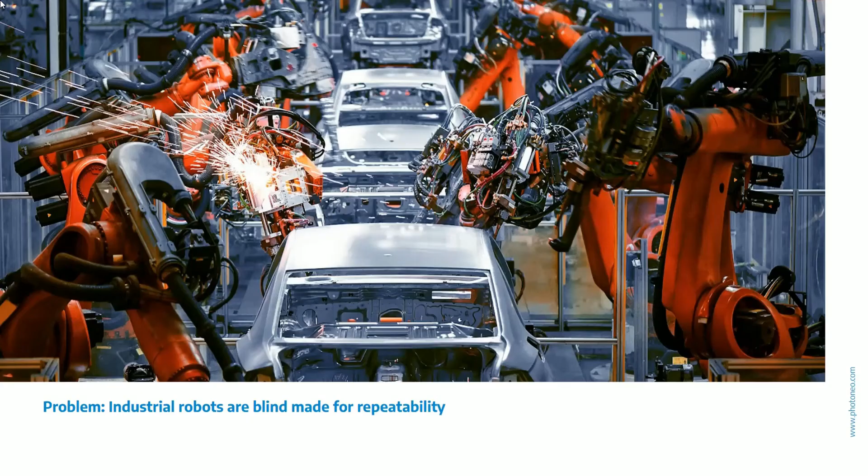Why have we started with bin picking as the first problem in vision-guided robotics? I'm sure you've seen this kind of production line or participated in its build, and it's surely an amazing piece of technology. On one side, you have metal plates entering the manufacturing process, with a number of welding robots, and on the other side of the production line, every minute or so, there is an entire car chassis built. Now, while this looks amazing, there is one problem associated with it, which was also a cost.

If you want to put anything into this production line, it costs you money. Either operators are stacking the metal sheets at the entry level of the production line for the robots, so they can go to exactly the same position for every cycle, or you need to build or buy a one-purpose machine, or a construction for stacking these metal sheets, pillars, screws, or anything required for a car chassis to be built.

At Photoneo, we were thinking about whether there is anything we can do about it, and a solution to that problem already exists, having been a subject of research in vision-guided robotics for a couple of decades. The definition of vision-guided robotics is simple: a robot should be equipped with a sensor or camera, and if you do so, your robot should be able, with the involvement of certain vision algorithms, to move towards a target.

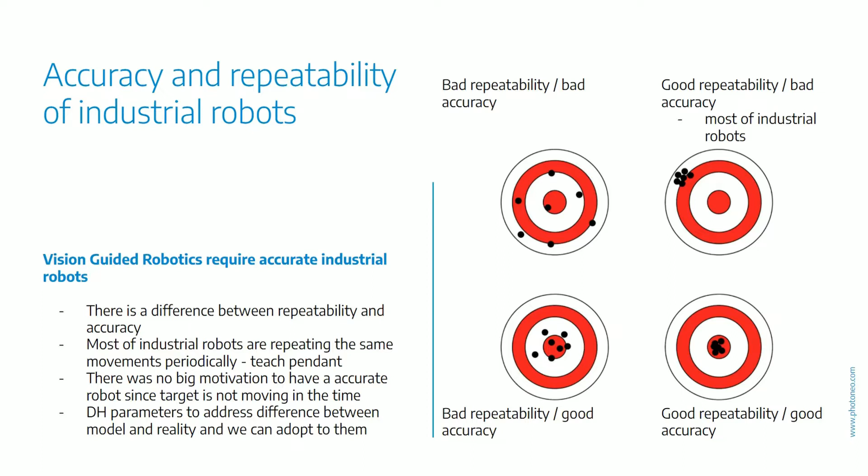Our motivation is transforming the experience and knowledge from projects delivered by Photoneo into a product which enables our partners to deploy robust and reliable bin picking applications. With Bin Picking Studio, we are able to adapt to many scenarios regarding 3D vision-guided robotic picking, whether parts are placed in the bin in a structured way, a semi-structured way, or completely randomly oriented.

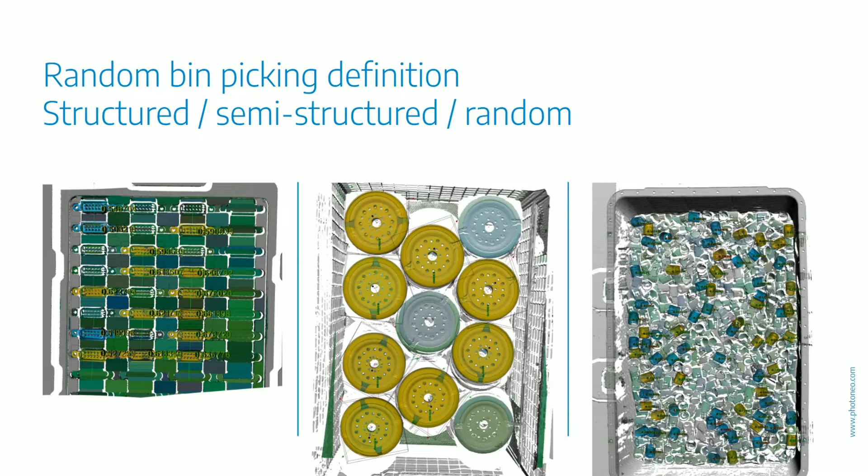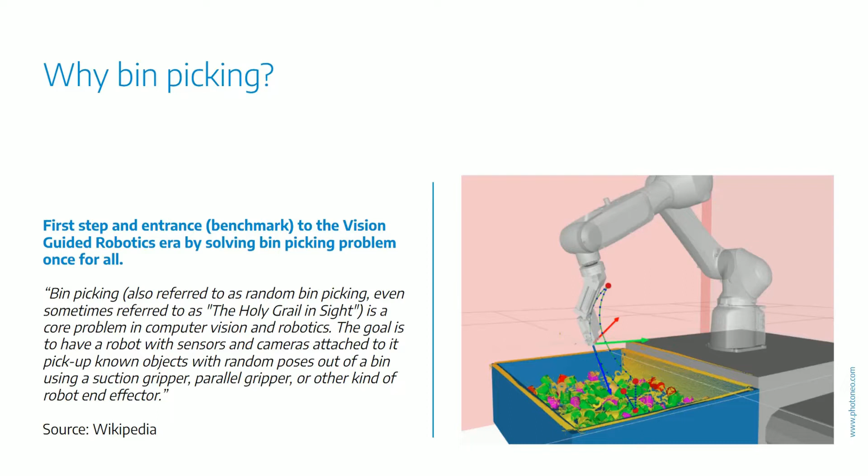Why bin picking? At Photoneo, we started working on bin picking applications because this is a core problem in computer vision and robotics. The goal is to have a robot with sensors and cameras attached to it, able to pick up known objects with random poses out of a bin using a suction gripper, parallel gripper, or another kind of robot end effector.

So why is it difficult to do bin picking? If you think about it, it wasn't so many years ago when the majority of bin picking applications were actually built on greenfield. What you need to do as a company is acquire certain skills in order to build a bin picking application. You definitely need a person who understands mathematics, geometry, and robot kinematics.

You need a person who is able to work with technical drawings, a person capable of programming a robot, and you need the operating system for running your software. You need solid software engineers to implement vision algorithms. You need a 3D vision sensor or camera, and you need to be able to create localization algorithms.

This is a wide variety of advanced skills, and it's really difficult to find a person who masters all of these skills. Even if you find somebody, it would be a very expensive thing. If you want to build a team where each member masters one of these skills, it's not going to be cheaper either.

So, we at Photoneo were thinking if there is anything we can do about it, and we found out there are actually just two skills available in the area of our customers: technical drawing and robot programming. So we created a tool designed for robotic integrators.

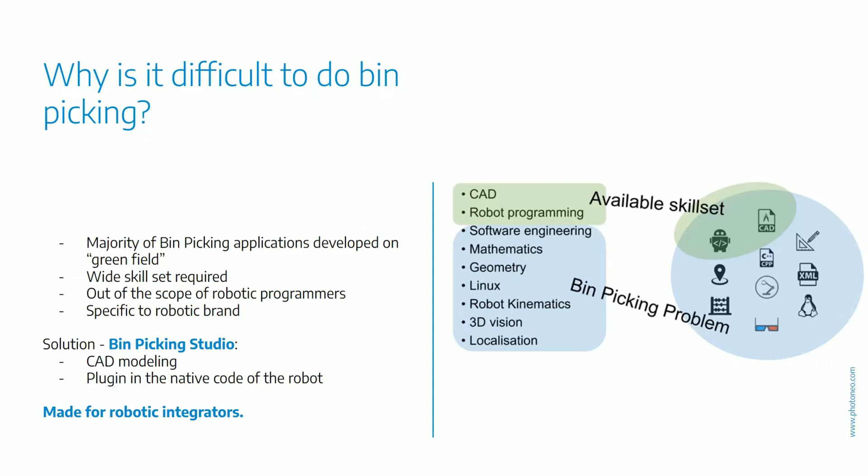When we look at the Photoneo product portfolio, the entry-level product is the PhoXi 3D scanner. This is your go-to scanner when looking for high resolution and high accuracy scanning of static scenes. Its structured light projection approach provides output in the form of precise point clouds for fast localization of any desired part. The robustness of the scanner ensures superior quality of scans, making it the best scanner for even the harshest environments.

PhoXi 3D scanner was awarded by the Vision Systems Design Innovators Awards program for its unbeatable performance and best-in-class resolution-to-speed ratio. Photoneo MotionCam-3D is the world's highest resolution and highest accuracy area 3D camera for dynamic scenes.

It is your go-to device for applications requiring fast and robust 3D acquisition. You can reconstruct accurate point clouds of various objects in high detail without compromises on quality caused by vibrations, ambient light, or motion blur. This makes it your ideal 3D vision companion for handling objects in motion.

The Bin Picking Studio solution is well established on the market, and we're currently offering its version 1.6. This is a complete solution which consists of a sensor, superior 3D vision with various sizes and scanning ranges, as well as optimized features for bin picking. It is also equipped with localization, an in-house developed CAD-based localization algorithm with smart features for bin picking like smart memory and quick scan.

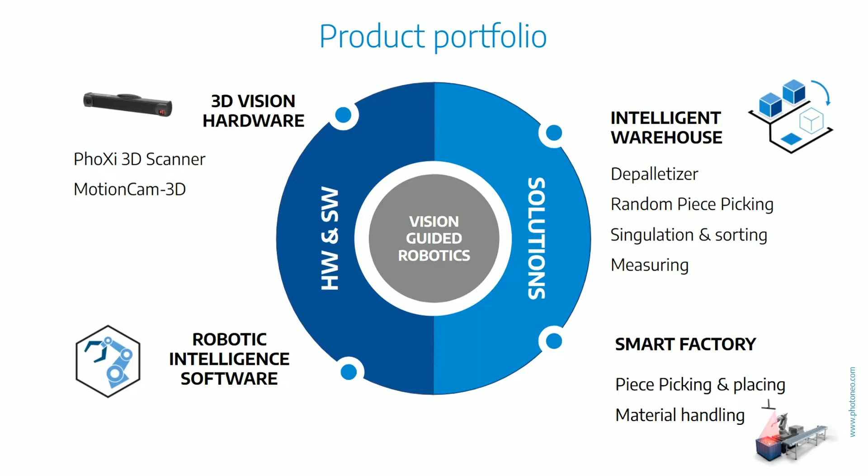11 different robot brands, more than 200 supported robotic models, and also offering a wide variety of commands. Photoneo is offering multiple localization approaches for different industrial areas, such as general industry, machine tending, plastic industry, foundry, logistic industry, and parcel handling or apparel industry.

We were thinking how to create a topology for such an application. If you buy an industrial robot, in default configuration you already have a pretty nice specification. However, since robotic applications are very wide, you can still buy options to extend the capabilities of a robot — I/O cards, safety options, conveyor belt tracking, or anything you can think of. We have built our software to be a complementary third-party option to the already available robotic options.

So how does it really work? You are getting an industrial-grade PC, which has a direct connection to the Photoneo PhoXi 3D scanner or other sensor, and this industrial PC has a direct connection to the robotic controller as well.

We do not change the working habits of the robotic programmers. We are just trying to extend the capabilities of the robot they are using. With our software and hardware configuration, you are also getting a plugin, which is a set of functions for your robot. So you just get a USB key, upload the additional plugin to the robotic controller, and suddenly you are able to call a new set of functions.

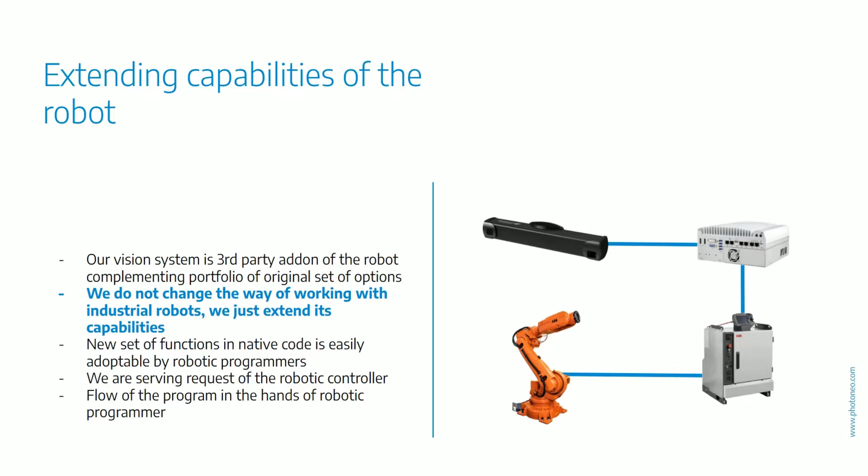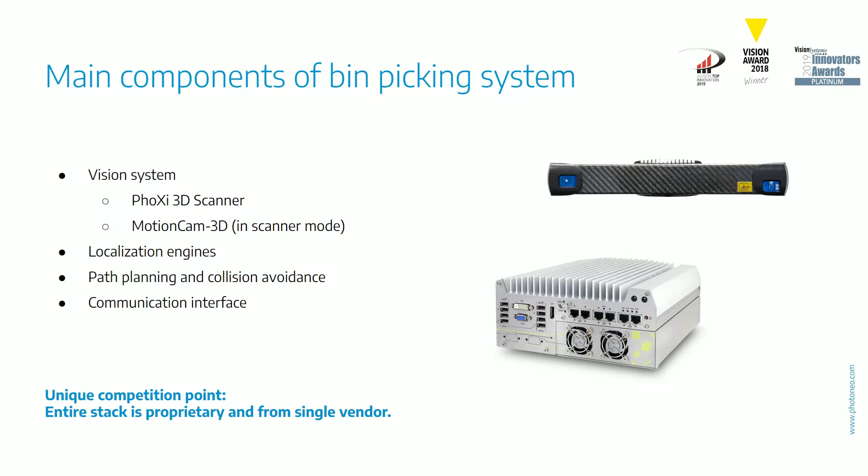All these components are delivered to you in a single package containing the vision sensor and the vision controller, an industrial-grade PC with pre-installed Bin Picking Studio. You just need a robot and a gripper suitable for your application.

Regarding object localization, Bin Picking Studio offers two types of localization engines. The first one is analytical. It takes the point cloud from the vision sensor and the CAD model of the object to be localized and applies analytical methods to find it in the point cloud. This approach is suitable for objects that do not vary in shape and size.

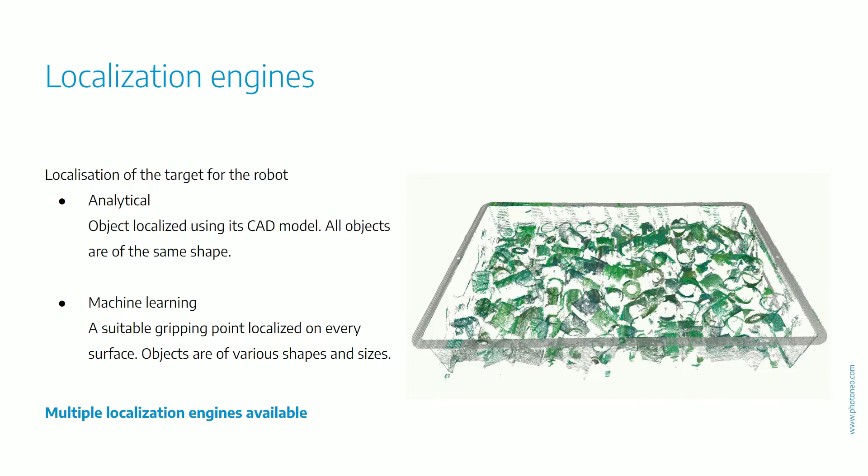The second engine is based on machine learning. It uses a neural network to identify objects of interest and suitable surfaces where the gripper could grasp the object. Therefore, the objects do not need to be identical. The neural network can learn to recognize all kinds of objects of various shapes and sizes.

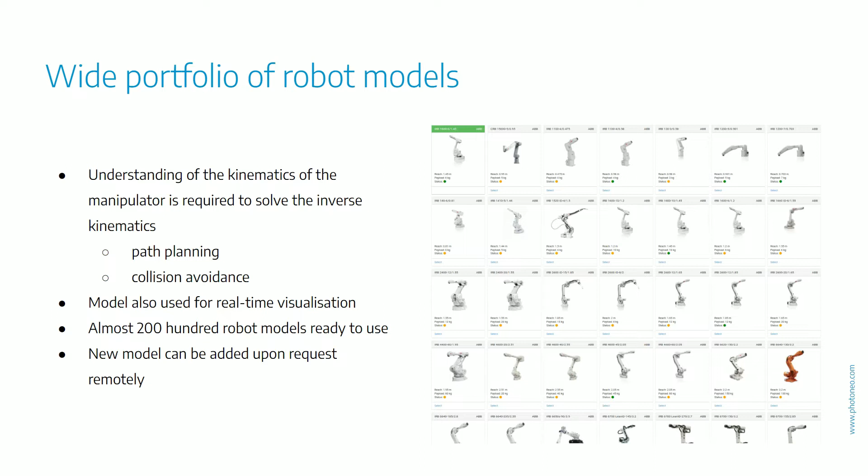The robot model defines the kinematics of the manipulator, which is essential for path planning, and it is also used for real-time visualization. Bin Picking Studio supports almost 200 robot models of several robotic brands. All these models are part of the system and ready to be used. In case your robot model is missing, it can be easily added to the robot database upon request.

There are two options available when it comes to placement of the vision sensor. You can either put it in a static position above the bin, or you can attach it directly to the robotic manipulator behind the last joint. Both approaches have their advantages. For example, with the static scanner, the robot's maneuverability is not limited and it does not have to stay still during the scan acquisition. On the other hand, the hand-eye approach enables capturing the scene from different viewpoints, getting closer to the objects and thus getting a more detailed point cloud, which improves localization performance.

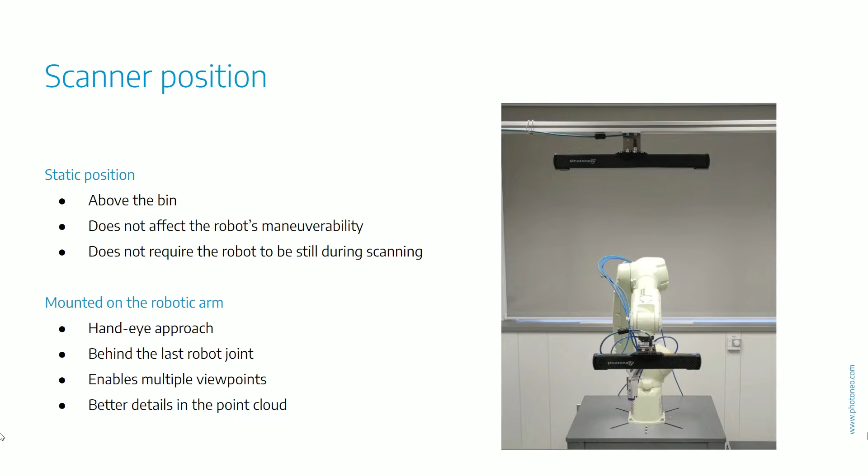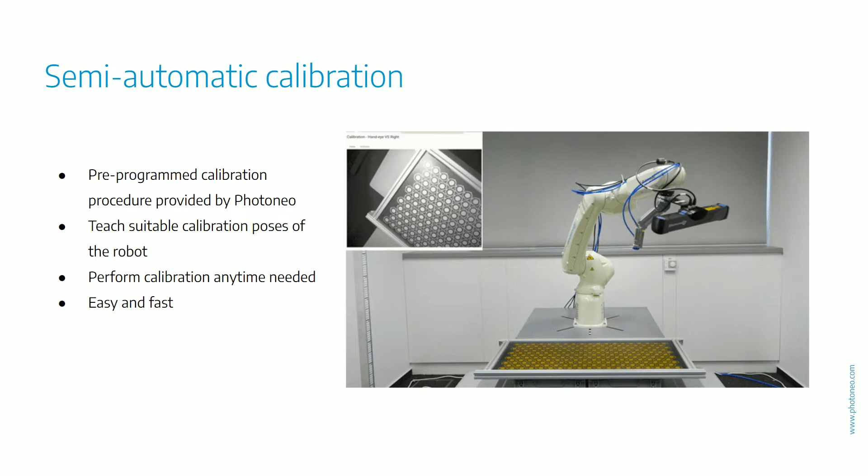The objects are localized in the sensor's coordinate system, and the robot needs them in the coordinate system of its own. Calibration is the process of identifying this transformation between the sensor's camera unit and the robot base. The process is very simple, performed using one of the provided calibration tools based on the calibration type, extrinsic or hand-eye. The calibration can be executed by the robot itself. Photoneo provides a program template that only needs to be added the calibration poses of the robot. Once prepared, you can execute the calibration anytime needed in a matter of minutes.

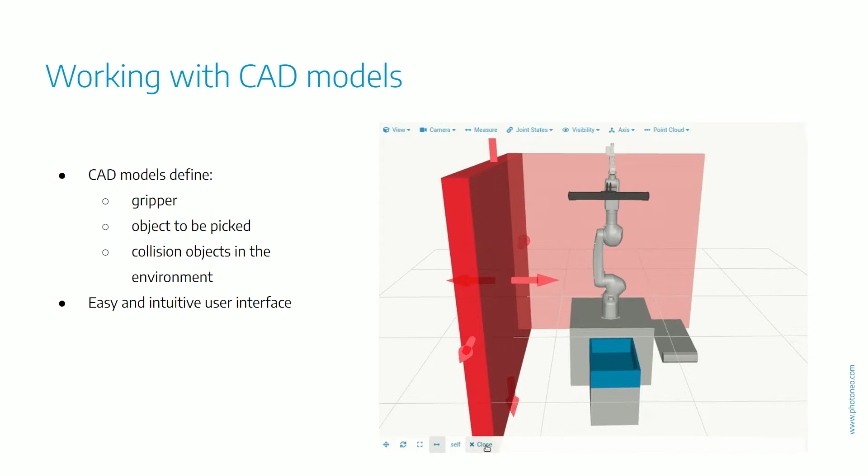Bin Picking Studio has a user-friendly and intuitive graphical interface. Very little skill is needed to operate it. All you need to know is the basics of CAD. CAD files define the gripper of the robot, the objects you want to localize, and the collision objects in the environment. Bin Picking Studio also contains a tool for drawing simple collision objects directly inside it.

Often, you need to work with multiple objects in a single bin picking application. The full configuration of your application is defined in the bin picking solution, which is divided into vision systems. A vision system is a concept that ties together several things: the physical sensor used by that vision system, the calibration for that sensor, because each vision system can use a different sensor, but also all of them can use the same one. Then the object to be picked by the vision system, and the localization profile which holds the parameters for localization of that object. The grasping method defining the strategy for object extraction, and some settings unique for each vision system.

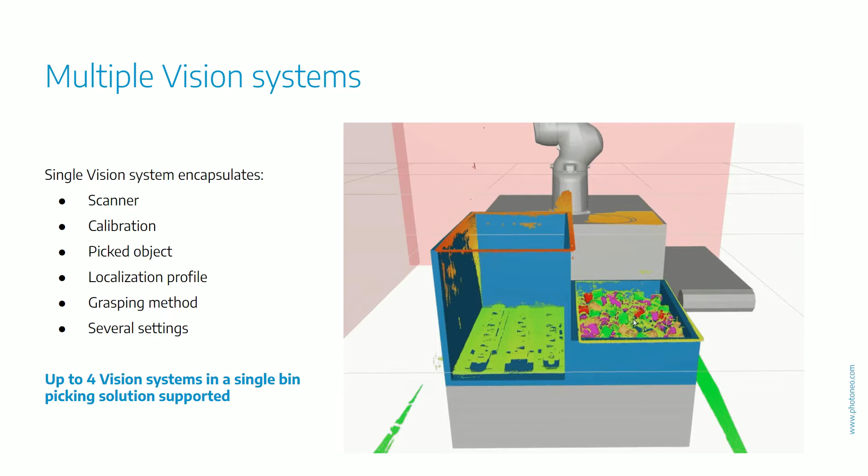A bin picking solution can use up to 4 vision systems, which means you can work with 4 different objects in a single bin picking application. The main goal of the Bin Picking Studio is to find collision-free trajectories for the robot to safely navigate it to the localized object so it can extract it from the bin. Since the objects are placed randomly in the bin, every single trajectory is unique and a result of complex mathematical computations.

To avoid any chance of collision, all elements in the scene are considered collision objects, including the point cloud from the sensor and the robot itself.

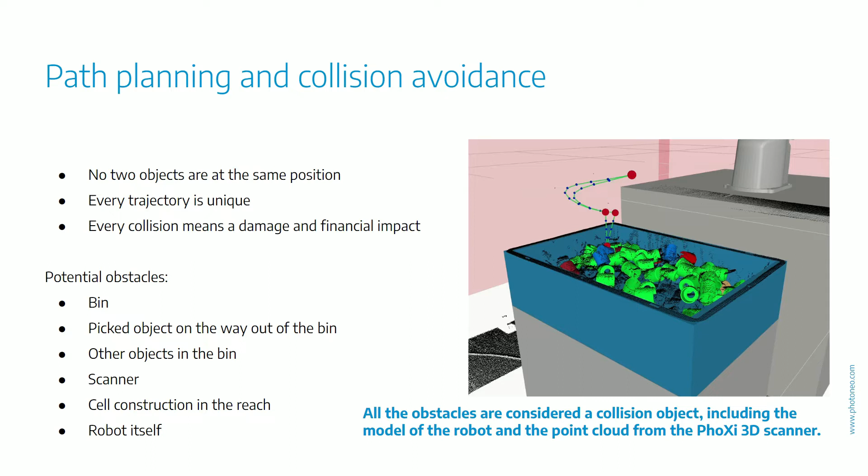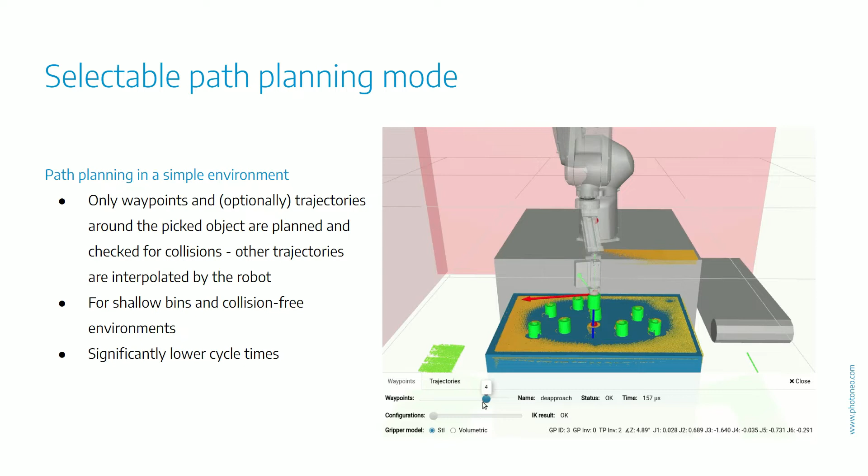Based on the bin picking application and its requirements, there are a couple of path planning modes available. For the simplest environments with no obstacles and shallow bins with no risk of collision, there is an option to turn off the path planning and collision avoidance feature, or you might keep it just for segments of the trajectory around the localized object. This approach leads to very low computation times and fast cycle times.

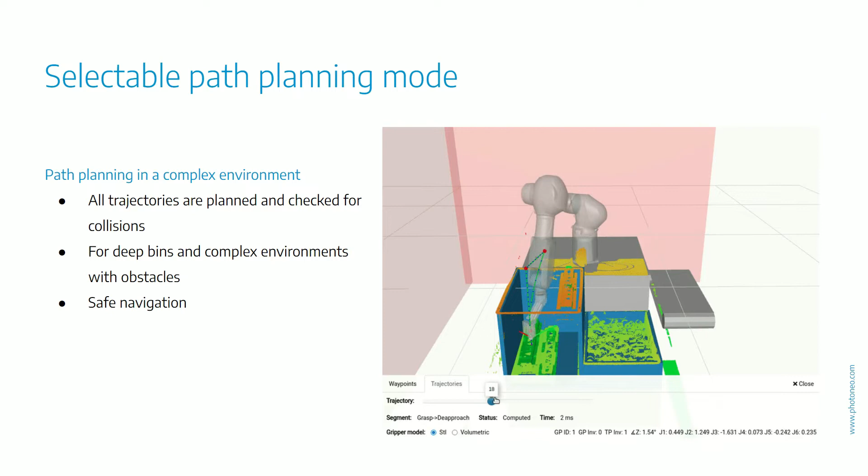On the other hand, in a complex environment with obstacles and deep bins that the manipulator needs to reach into, path planning and collision avoidance should be turned on. The path planner will find a way around all obstacles and safely navigate the robot to the object inside the bin. After the object is picked, the path planner takes it into account when planning the trajectory back out of the bin, so the picked object doesn't collide with the walls of the bin.

While commissioning the bin picking application, you might need to tweak some parameters to achieve the best results. To simplify and speed up the testing phase, the Bin Picking Studio includes the first iteration of its simulation feature that enables you to test the basic bin picking functionality without the use of the real robot.

During the run of the bin picking application, whether in simulation or production mode, Bin Picking Studio renders the localized objects with different colors based on their path planning status. It also offers a powerful debugging tool that lets you inspect any localized object, check all its properties, and preview the computed trajectories.

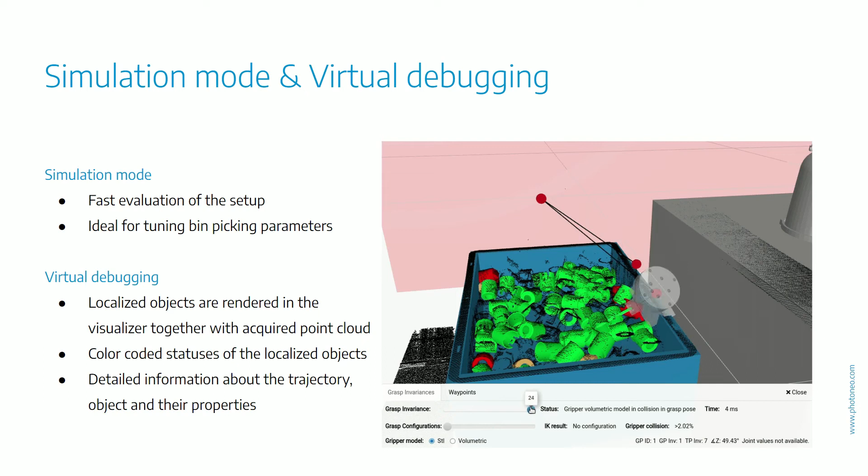On the other hand, any green object is a suitable candidate for picking, and you can preview its complete trajectory.

The last thing I would like to talk about before we move to the bin picking studio itself is the remote access feature. When the bin picking application is deployed into production in your factory, it is beneficial to be able to check its status anytime needed. Bin picking studio lets you do this remotely using one of the available remote access methods.

The first one is access from the web browser of your own computer. Bin picking studio is a web-based application that runs locally on the Vision controller, but can also be configured to be accessible from other devices on the same local network.

The other option is the use of the pre-configured VNC server running on the Vision controller. You just need a VNC client of your preference installed on your own computer that lets you connect to the server on the Vision controller.

The last option is to use the pre-installed TeamViewer. This application is mostly used by Photoneo support technicians when providing remote support.

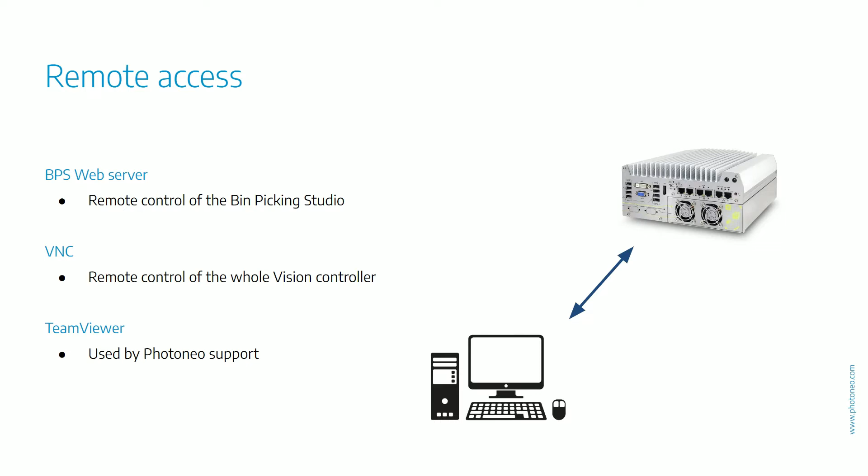Okay, that's it from the presentation. Let's go directly to the bin picking studio.

Bin picking studio is running on an industrial-grade PC that we call the Vision controller. The operating system is Ubuntu 18. All bin picking studio related stuff is located on the desktop.

There are some example solutions that you can import into the bin picking studio and check them out. There is a directory where you can put your saved scans to create fake scanners out of them for later use when you do not have the real scanner connected, and there's also a directory where you can save the scans.

Bin picking studio is started automatically when the Vision controller boots up, but it can also be started, restarted, or stopped using one of these shortcuts on the desktop.

During the whole time the bin picking studio is running, the PhoXi Control is running too alongside it. The PhoXi Control is the application that is used to operate the scanner. You would use it to configure the advanced parameters for scanning.

So let's go to the bin picking studio. This is the login page of the bin picking studio. I'm going to log in to my account that I created when I first started my bin picking studio.

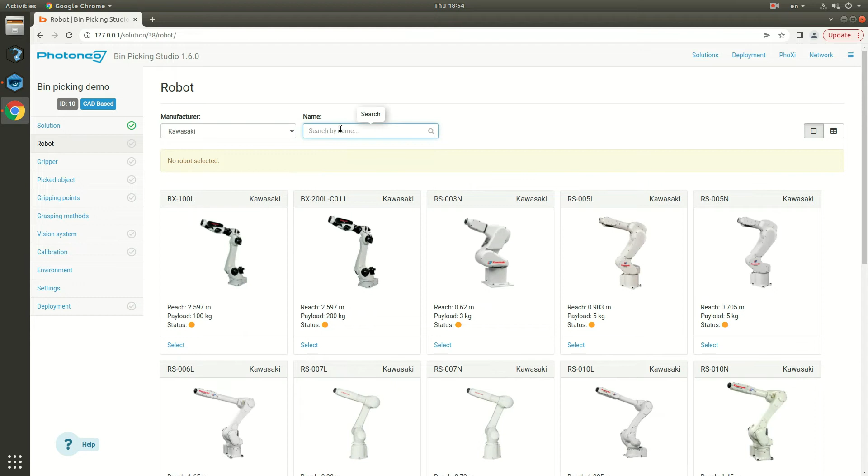Let's go to the selection of the robot. I'm going to use a Kawasaki robot, specifically RS007L. I can filter the robotic brands, so I'm going to choose Kawasaki, or I can search for my robotic model. So this is the one I'm going to use. I'm going to select it.

On the side of the robot, we need to load the robot module, a set of files containing functions for communication between the robot and the vision controller and execution of bin picking trajectories. We also provide several example programs for basic use cases. I have already loaded my robot module using the integration guide for Kawasaki. You can find all integration guides for all supported robotic brands in the documentation section.

Okay, let's move on. Let's get back to the solution and go to the gripper. There are already some grippers defined. These are from the other solutions. I'm going to use another gripper, so I need to create it from scratch. So let's create a new one.

It needs to have a name. And I need to provide a CAD file. So I'm going to click Browse and select the gripper STL. I'm going to hit Save, and right now the model is being uploaded and the volumetric model is being generated automatically. This volumetric model is used for collision checking.

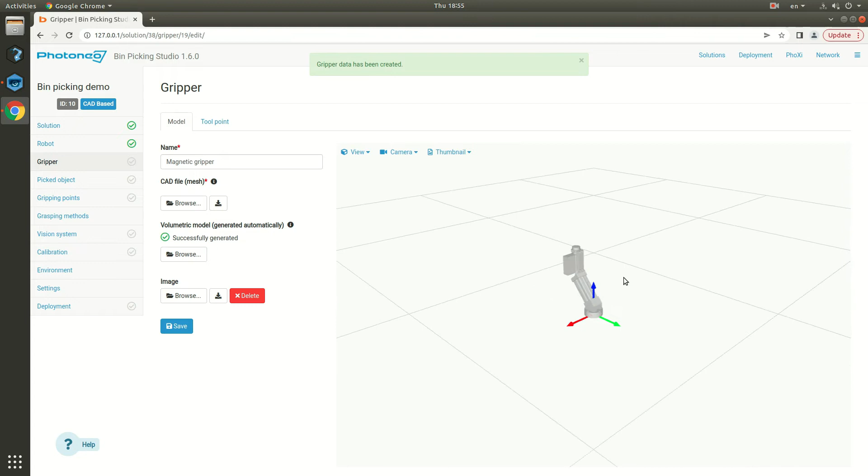Let's check that the origin of the provided file is at the correct place, which is the base of the model, because here the real gripper will be attached to the robotic flange.

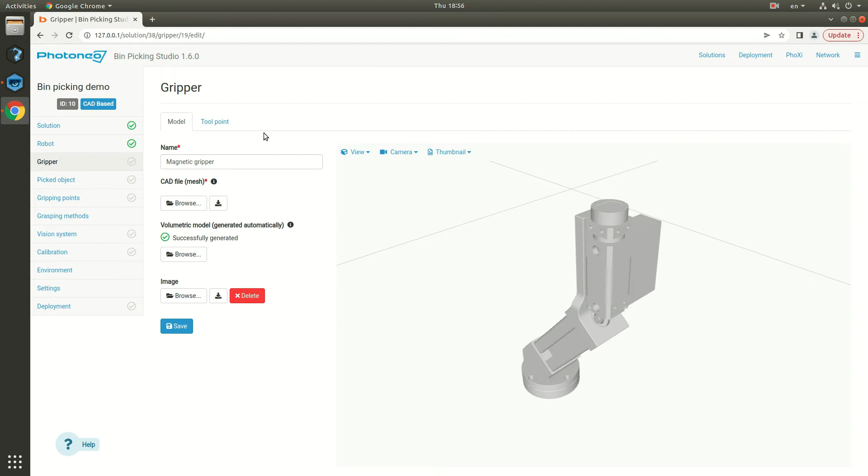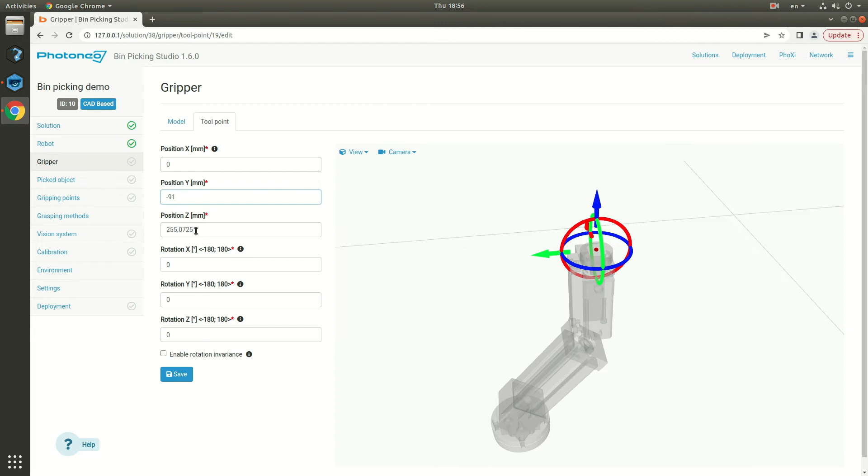Now we need to set up the tool point. I'm going to go to the tool point tab, and here you can use these arrows to select the tool point. I'm going to use the arrows to mark the approximate position of the tool point, but the best way to do this is to calibrate your TCP on the robot and put the values directly into the respective fields. I know the values for my gripper, so it should be 91 millimeters in the y-axis and 254 for the z-axis. So this is the correct tool point as calibrated on the robotic controller.

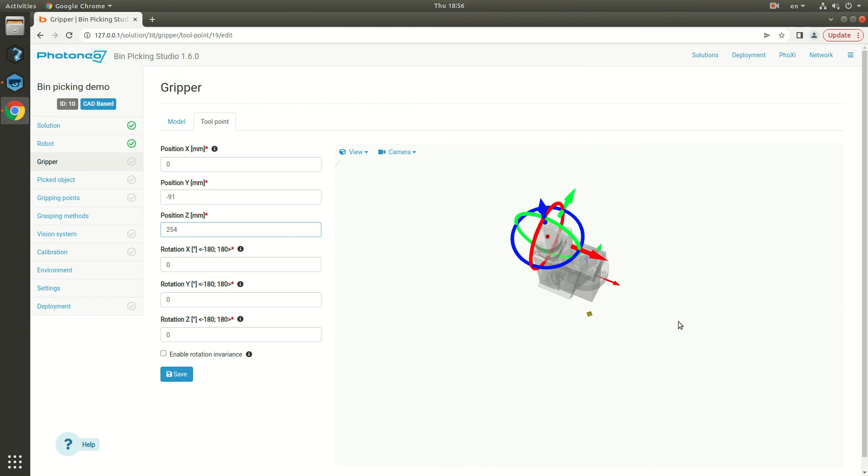Now this is a magnetic gripper with a single magnet, and it does not matter how it is rotated when it grasps an object. From the tool point of view, it is symmetrical. To tell the system about the symmetry, I'm going to allow the rotation invariance.

Automatically, the z-axis is chosen as the axis of symmetry, and it appears in the visualizer going through the tool point.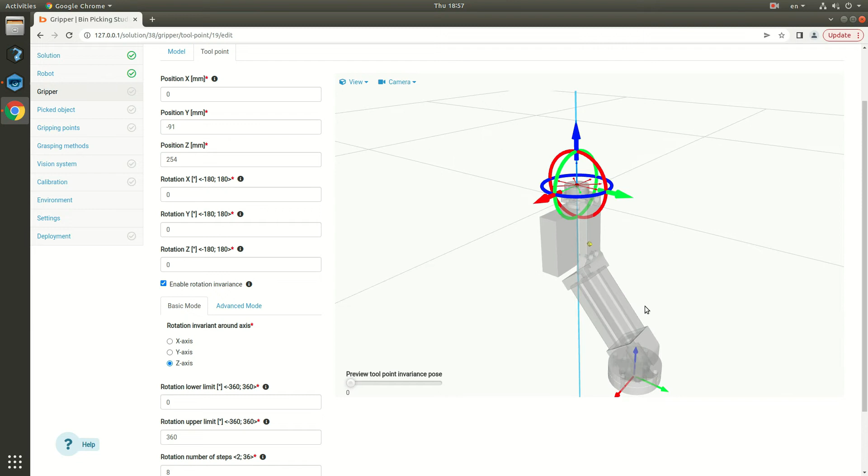I can limit the range of symmetry, but in my case, the tool point is fully invariant for rotation, so I'm going to leave it as it is.

I can also choose the number of steps. The default is 8, and it is usually a good choice. You need to remember that with increasing number of invariances, there is more computation that needs to be done, so the path planning will be slower.

Let's preview my tool point invariances using the slider. You can see that the gripper rotates around the tool point.

I'm satisfied with this, so I'm going to save it. And all that's left to do is to select this new gripper for my solution.

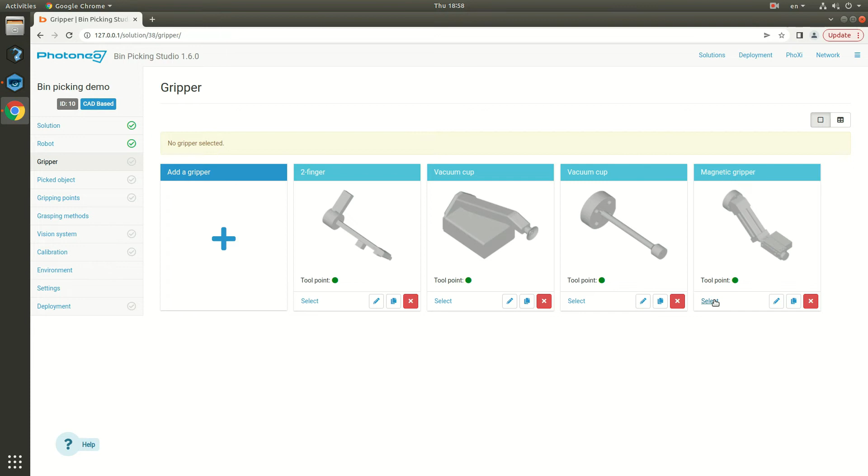Let's go to the picked object. I can define up to 4 picked objects to be used in a single solution. So let's add a new one.

The process is very similar to the definition of gripper. We need to name the object. I'm going to simply put in object. I can provide a description of the object, for example, that this is a metal object.

And I need to provide a CAD file. So I'm going to choose the correct one and save.

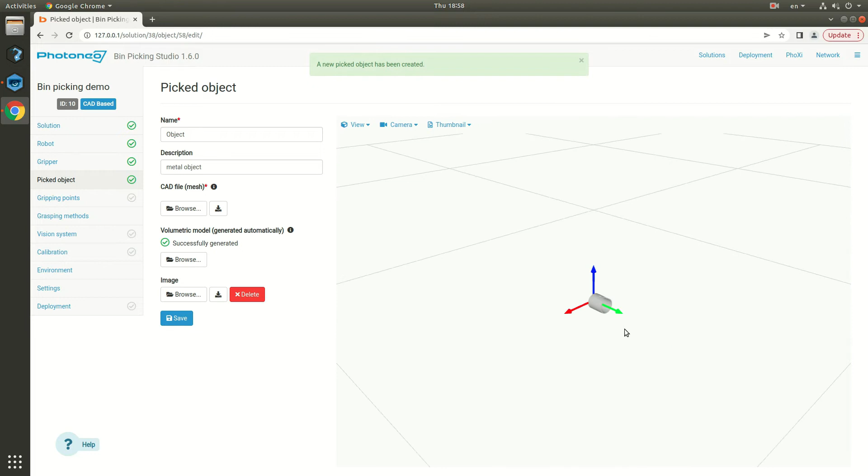Once again, the volumetric model used for collision checking is being generated. And in the visualizer, I'm going to check that this is the correct object. Yes, it is. This is the object I'm going to be picking today.

Now we need to tell the system how the actual object will be picked. So we need to define some gripping points. You can define several gripping points for each object. Only with a good set of gripping points will the system be able to calculate a path for every object in any position and orientation. So let's create a new gripping point.

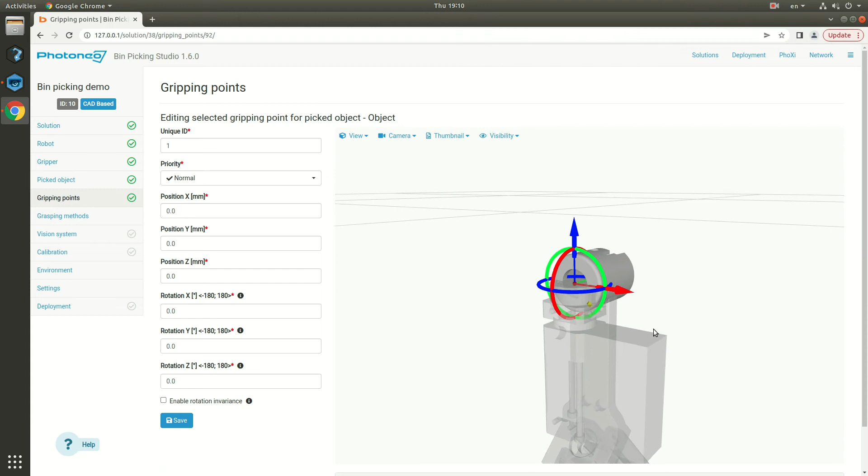As you can see, the gripping point is automatically placed into the origin of the CAD file of the object. So I need to adjust its position a bit.

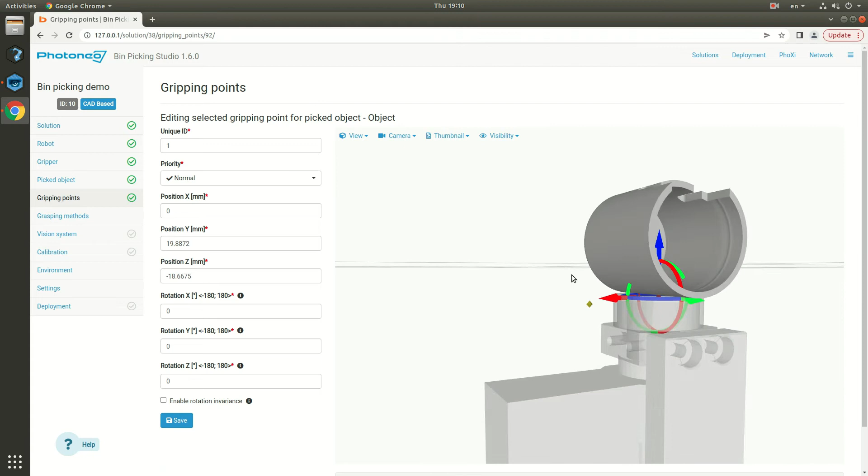Again, this is a very similar process to the definition of the tool point. I'm going to define the gripping point so it almost touches the surface of the object on its side.

Now, we have 8 invariances on the tool point because it is invariant for rotation around its z-axis, which means we actually have 8 grasping combinations.

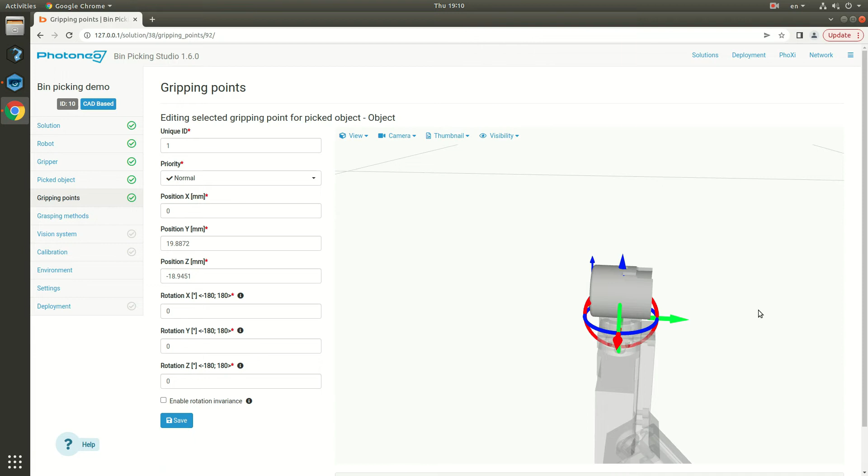But we can also consider this object invariant for rotation since it is basically a cylinder. Right now, I don't care about the holes on the side, so I will enable rotation invariance also for the gripping point.

The axis is clearly not correct, so I'm going to select the y-axis. Okay, now it is correct.

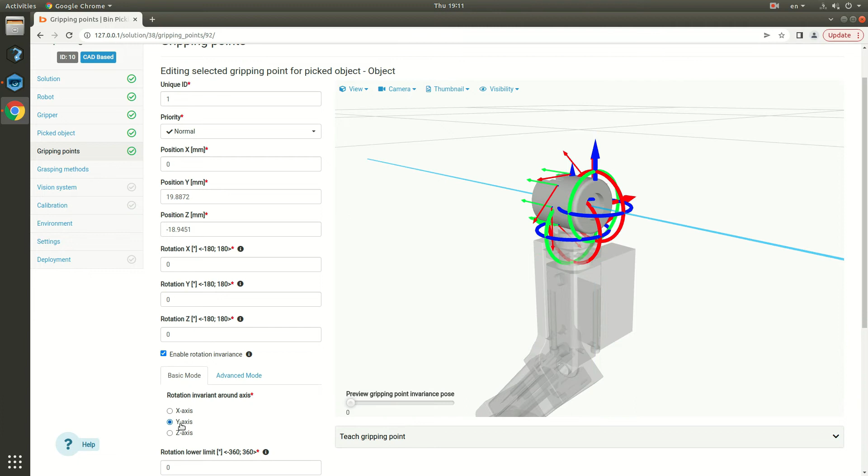It is going through the origin of the CAD file of the object, and I can preview the grasping configurations, the invariances of the gripping point using the slider.

I will again choose 8 steps, which is enough. Right now, I have a total of 8 times 8, so 64 grasping combinations.

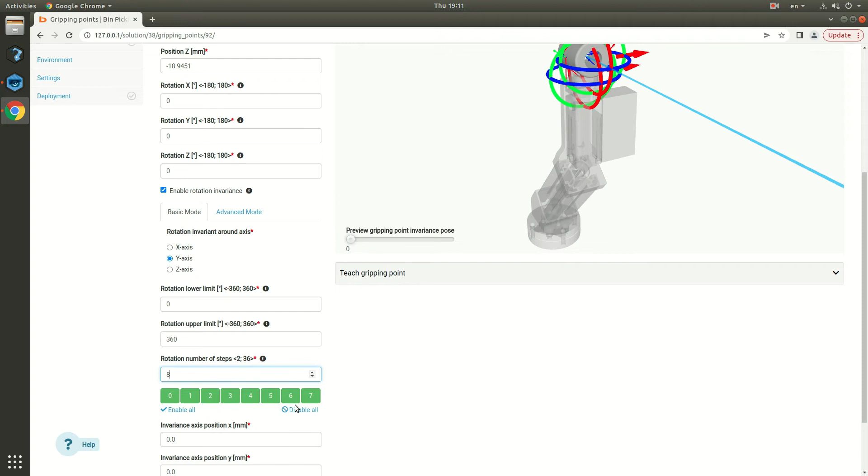I guess I could grasp the object also from the bottom or the top, based on how you look at it. So I'm going to create another gripping point.

Again, I'm going to adjust the position of the gripper. And this is the only place where the gripper can touch the object, so I'm going to save.

I can choose a priority for my gripping points so that the system will prefer a specific gripping point during path plan calculation.

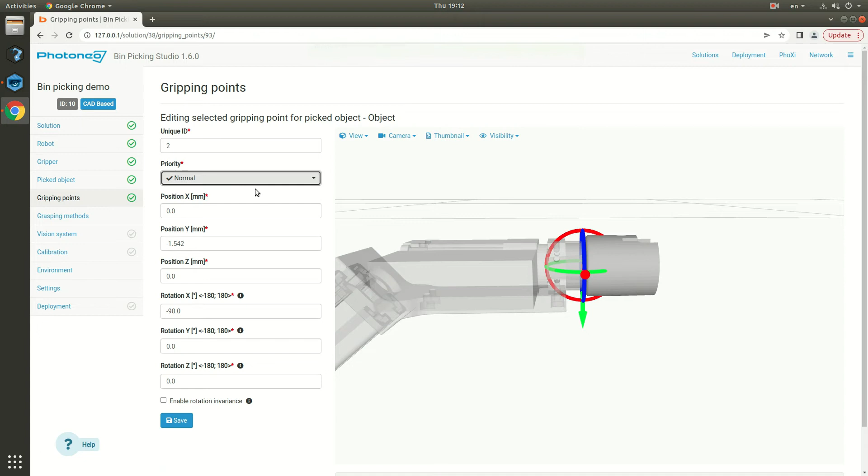I also have the option to disable a gripping point or a specific invariance, even a tool point invariance. This is especially helpful during teaching of placing positions for oriented placing.

You see, the tool point invariance, the gripping point ID, and the gripping point invariance accurately define how the object was picked. These values are sent to the robot, and we can use them to teach placing positions.

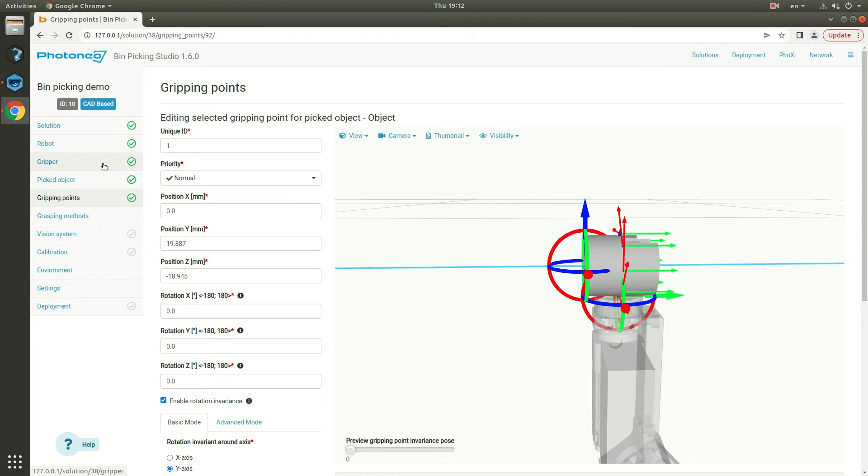Once a combination has been taught, you can disable it so that the system will not use it anymore, in order for you to teach the rest of them.

There are a lot of combinations, but since the object is invariant, I do not care about the gripping point invariance at all. So I only need to teach a combination for each tool point invariance and a gripping point.

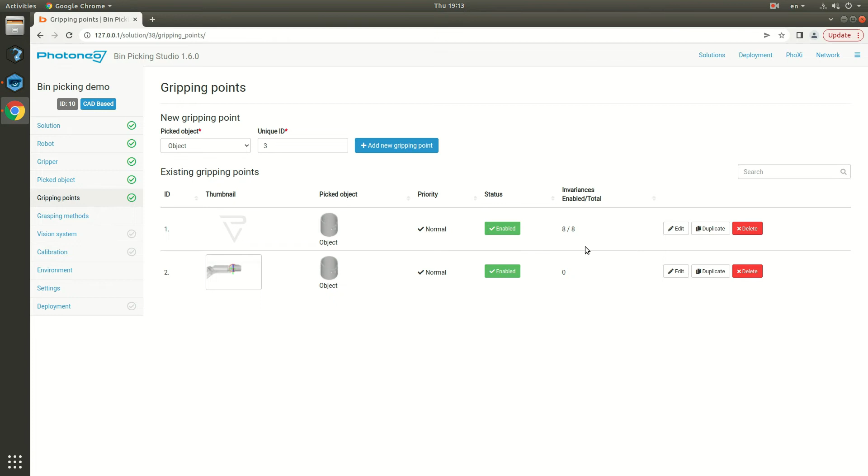And a skillful robotic programmer can use offsetting functions on the robot that will make the job even easier. Okay, that's all from the gripping points.

Let's check the grasping method. Section grasping method does not have a check mark because there is always the default grasping method present. You can create several grasping methods if your application requires it.

Let's check the default one. Grasping method is basically a blueprint for the bin picking trajectory. We are going to create several waypoints, and between these waypoints, the path planner will calculate the trajectories. Suitably defined waypoints will make path planning more successful and faster. There are 5 mandatory waypoints.

Start and end waypoints are defined on the robotic controller and are sent to the vision controller at the beginning of bin picking. Between these 2 waypoints, every trajectory is unique and generated by the Bin Picking Studio. Always try to define these waypoints above the center of the bin to keep the planned trajectories as short as possible. You can move the end waypoint towards the placing position a bit. The grasp waypoint is a gripping point or its invariance, so it depends on where the object is localized.

Between the approach and the de-approach waypoints, all trajectories are always linear. These waypoints are placed relatively to the grasp waypoint and they maintain the orientation of the grasp waypoint. Let's check the individual waypoints.

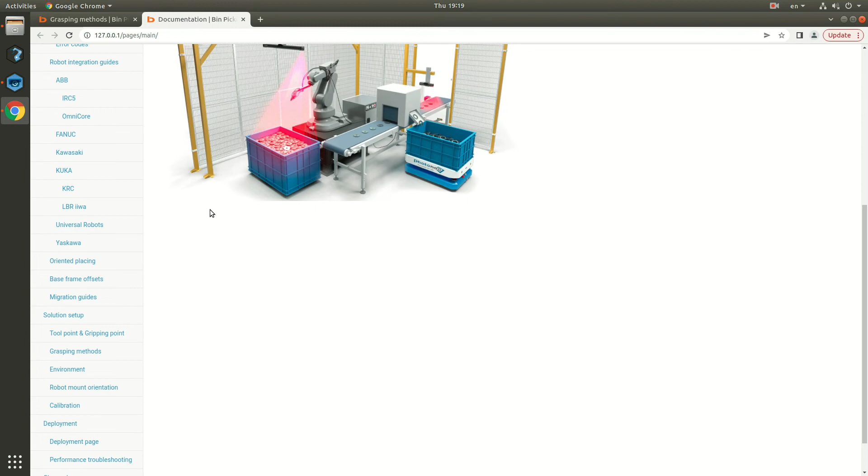Then there is option to make the de-approach relative to the start or end waypoint. As I said earlier, these are defined on the robotic controller. I can use them to create a waypoint leaning towards one of these waypoints. Why? Because when I have an object localized near a wall of the bin and my start waypoint is defined above the center of the bin, I can create the de-approach waypoint in such a way that it will be leaning towards the start waypoint and away from the wall of the bin. That can be very helpful.

Okay, for the other parameters, again, I must plan linear trajectory. I will leave the approximate positioning and I won't select any procedure for the gripper.

Finally, let's check the end waypoint. And I will leave the end waypoint as it is. I do not need to change any parameter. That's it for the grasping method. And let's go to the vision system.

A vision system binds together several things: a scanner with calibration, a picked object and its localization profile, a grasping method, and some settings unique for each vision system. Let's create a new one.

Vision system needs to have a name. I'm going to call it object detector. Each vision system has a unique ID through which the robot identifies it. In each solution, you can have up to 4 vision systems that can run in parallel. The robot can request a trajectory for the object from the first vision system, then a trajectory from the second, and so on.

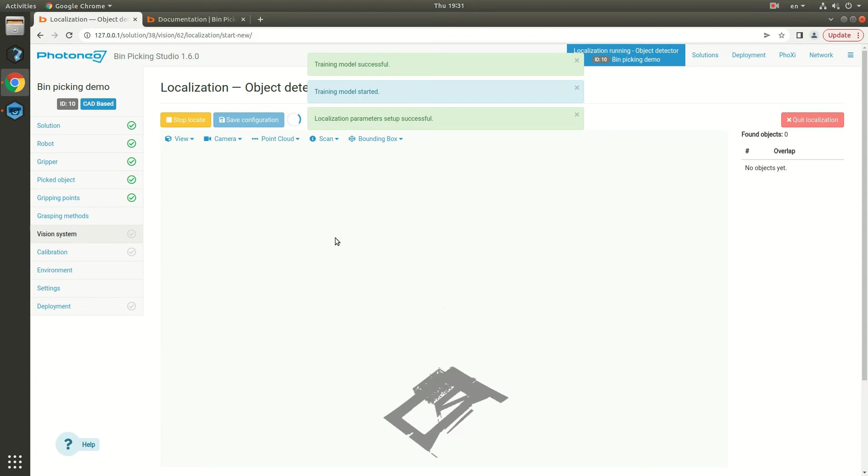Let's directly click Start Locate to see how the localization performs with the out-of-the-box settings. You can see that the localization found a lot of objects, but let's check the basic parameters.

I'm going to leave the timeout on 10 seconds. I'm definitely going to increase the overlap from 15 to 50%, which sounds like a good value. And I'm going to define a bounding box just to be sure that no object is localized outside of the bin. This is especially helpful when you have multiple bins with objects and you only want to localize objects in a single bin.

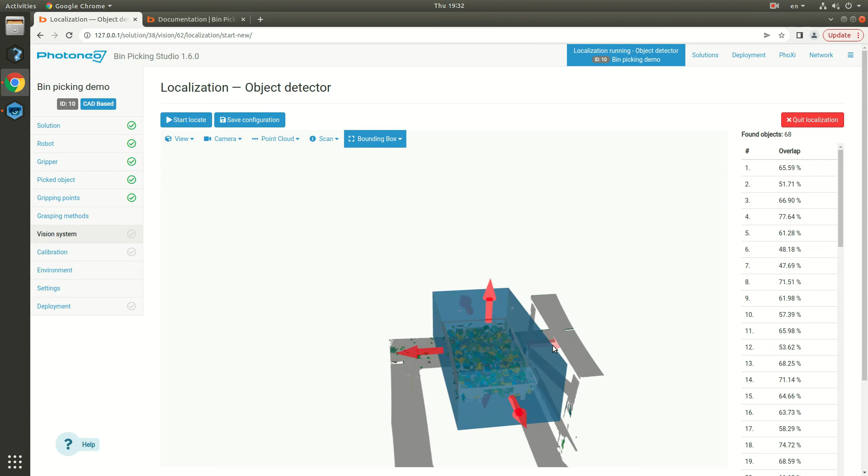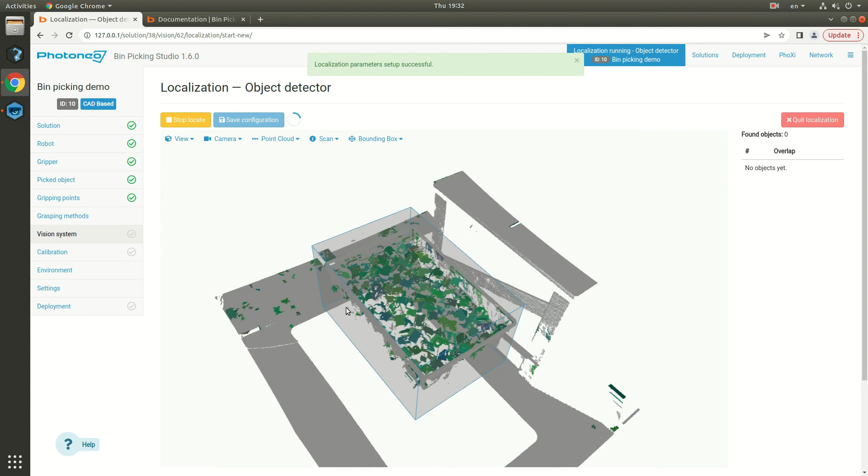Let's click Start Locate to see how the localization result changes with the new settings. Okay, this looks pretty good. Let's save the configuration and quit the localization.

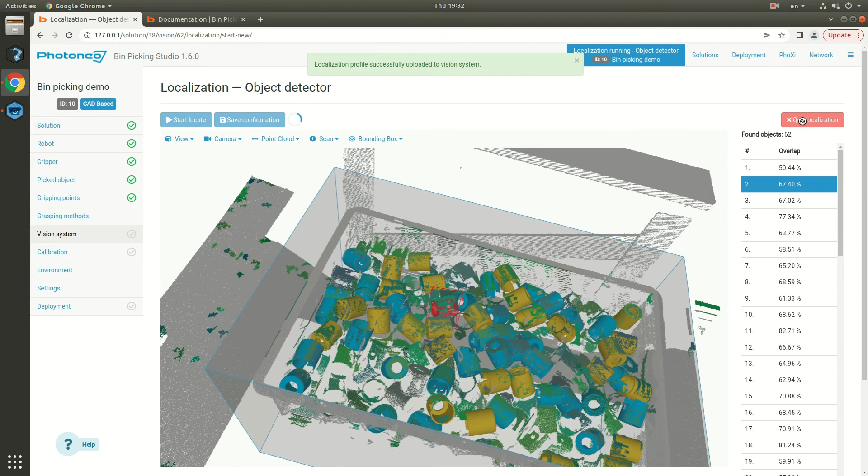Configuration of the vision system is almost completed. There are 2 settings unique for each vision system. The first one is gripper collision sensitivity. This parameter defines how much of the volume of the gripper can collide with the point cloud in the grasp waypoint. This value should of course be as low as possible, basically just to account for some noise in the point cloud that could not be filtrated or some light contact between the gripper and other objects around it.

Then there is fast scan. Fast scan is a feature that helps improving the cycle time. How it works is that instead of the full 3D image of the scene, so the point cloud, only a 2-dimensional texture image is taken and compared with the one from the previous scan. Based on the fast scan settings, the system evaluates how much of the scene changed. Each point of the texture image is paired with the point of the point cloud.

So when the part of the scene where an object was previously localized changed too much, the object is forgotten. It was either picked or removed. On the other hand, objects in the unchanged parts of the scene are localized much faster than during a full scan. Let's look at the parameters.

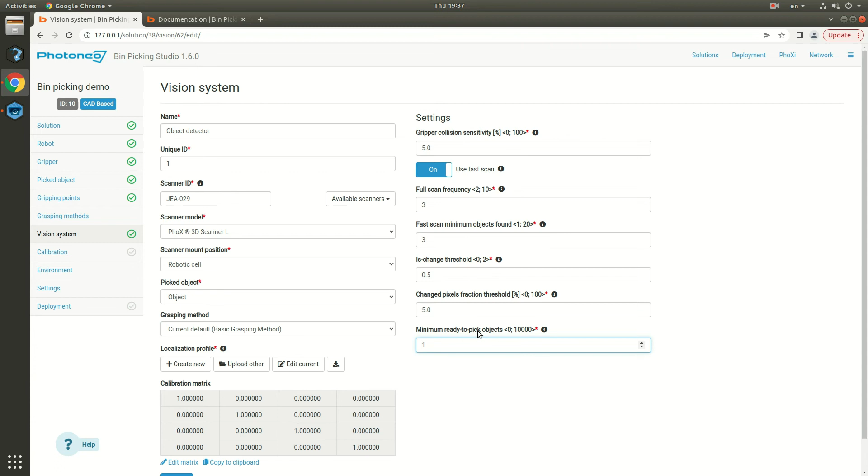There's full scan frequency, so only each, in this case, third scan will be full scan, the other 2 scans will be fast scans. But full scan will be also taken if less than 3 objects are found during the fast scan. Then these 2 parameters define how much the scene can change, and the last one says that if less than one object is ready for picking in the current run, the next scan will be full scan in order to localize more objects to have more candidates for path planning.

Okay, I'm not going to use this feature right now. I'm going to finish configuration of my vision system by calibrating it. Let's go to the calibration page and start calibration.

My scanner is stationary above the bin, so I'm going to perform the extrinsic calibration. For this type of calibration, the tool to be used is the calibration ball. The calibration ball is included in the Bin Picking Studio package. In my case, it is a snooker ball, so I'm going to choose it and click Proceed.

While the calibration is starting, I will remove the bin to create space for calibration, because I want to calibrate in the volume of the bin. I will also rigidly attach the calibration ball behind the last joint, so on the gripper. I will let the robot take care of the calibration.

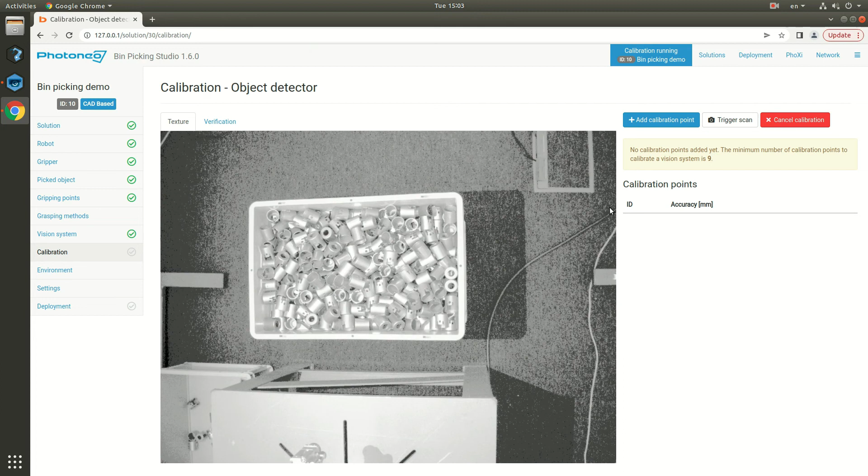I'm going to start the robotic program and wait for the calibration to complete. The robot module for each robotic brand includes a calibration procedure where you just need to reteach your robot calibration poses, and then it can be used anytime you need to perform the calibration. You can see that the robot moves between the poses and it requests adding of a new calibration point itself. Of course, I could also do this manually, but this is much faster once you prepare the program on the robot. We need to take at least 9 calibration points to have enough data for calibration.

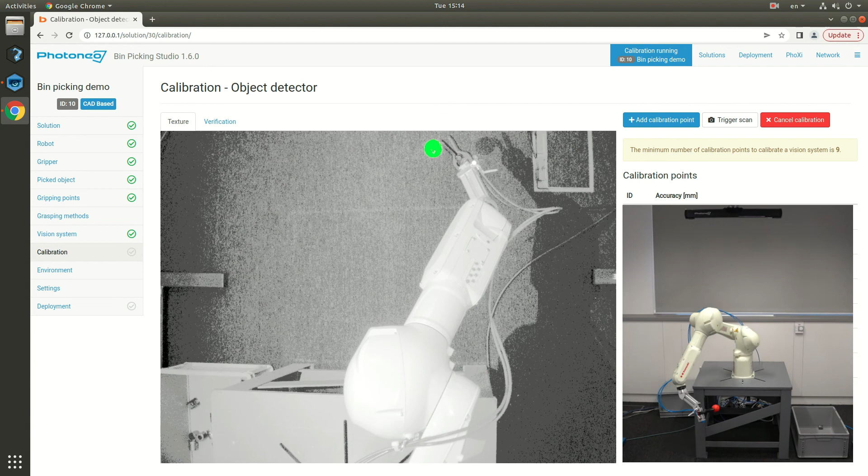Once completed, the Bin Picking Studio tells me the accuracy of my calibration. I am also going to check the actual overlap of the point cloud with my robot model.

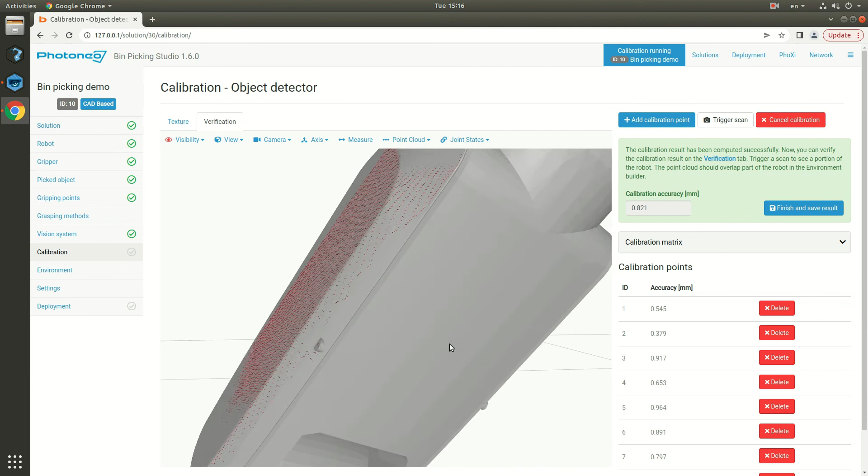This looks pretty good. The point cloud is overlapping with my robot model, so I'm going to finish and save the calibration.

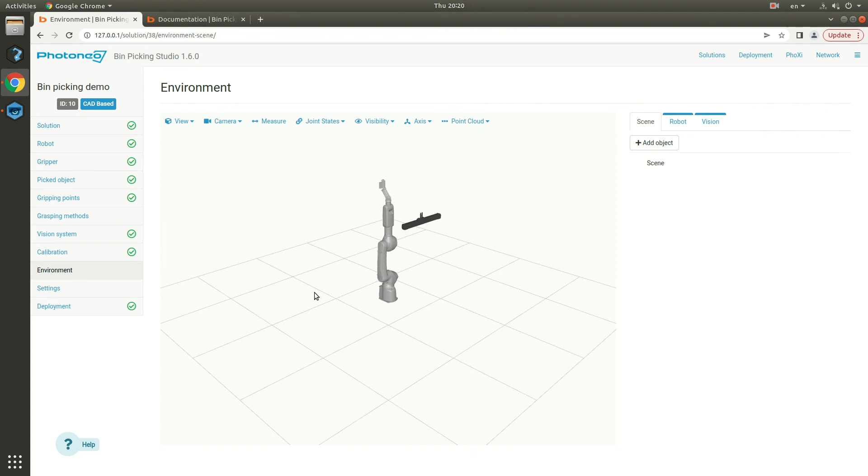After successful calibration, all required steps of the solution configuration are completed. However, I have collision objects around my robot, so I'm going to go to the environment page to define them. That way, I can be sure the system will know about them and the robot won't collide with them.

Currently, there's only the robot and the scanner on the scene. The scanner's position is based on the calibration. It is also a collision object, so the robot cannot touch it. Let's define a base for the robot.

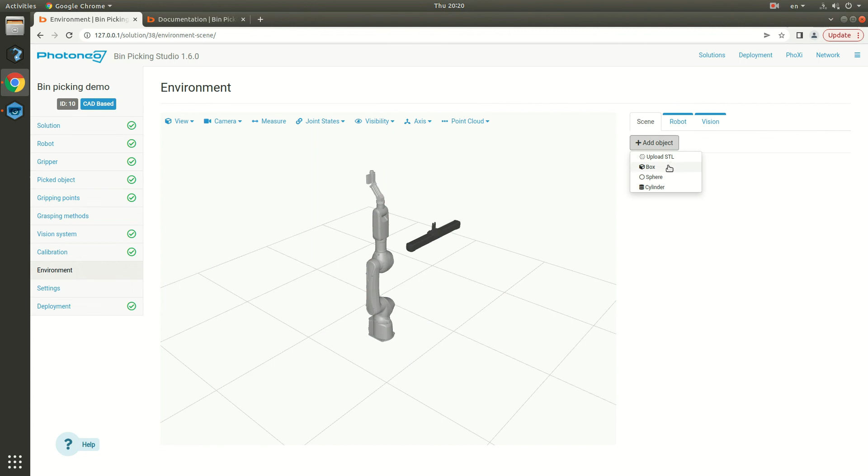I'm going to draw a simple box. The name will be base, the type is environment, and I will place it a bit lower, just under the robot.

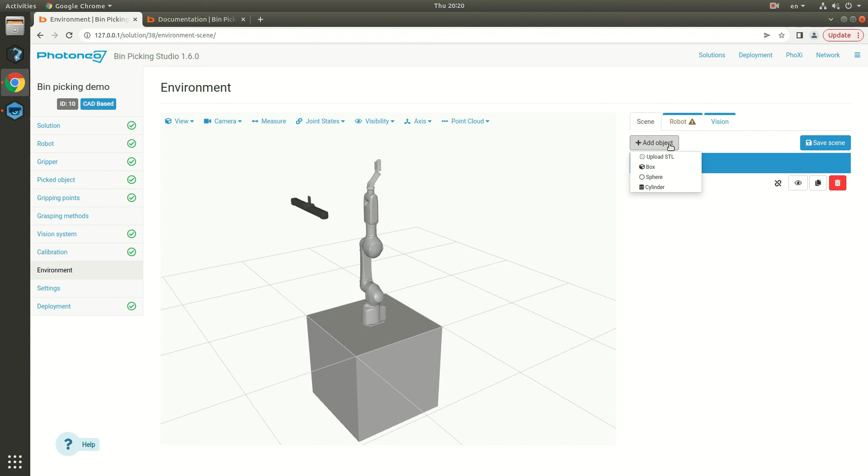Now let's define a bin. I have the exact model of my bin, so I'm going to upload an STL. The name will be simply bin. I need to select the CAD file, and the type is bin.

Let's move it into the approximate position.

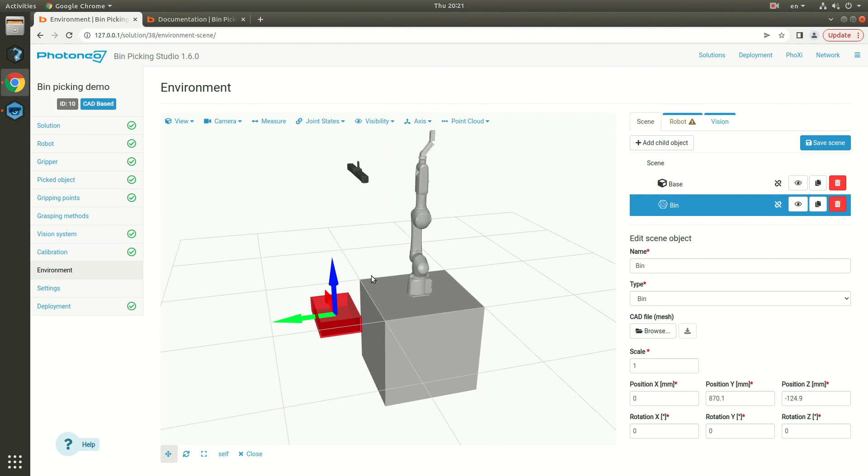Since my vision system is already calibrated, I can go to the Vision tab, connect to my scanner and trigger a scan. The point cloud in the visualizer will now help me adjust the position of my collision objects. My robot base is a bit smaller, so I am going to resize it.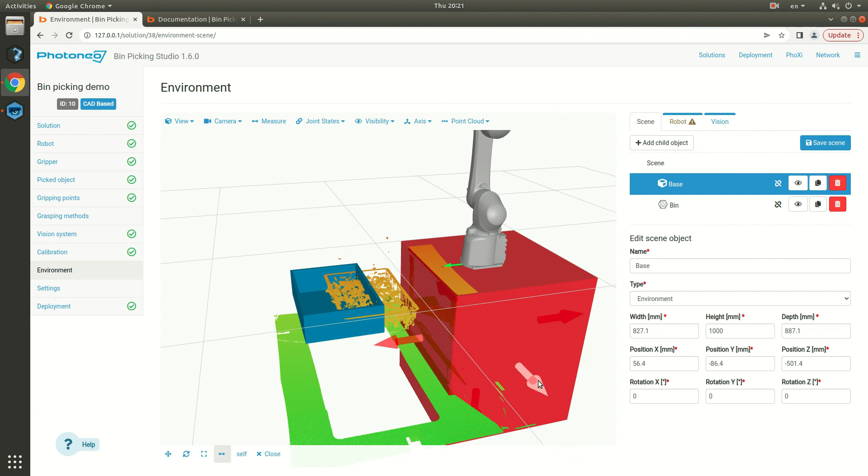And I will also move the bin so that it overlaps with the scan.

Finally, just to be sure, I will define walls so the robot won't be able to move through them. I can simply put the robot and the bin inside another box object. I will call it walls, and this time I will choose virtual type so that it is transparent.

Finally, let's resize it and place it into the correct position.

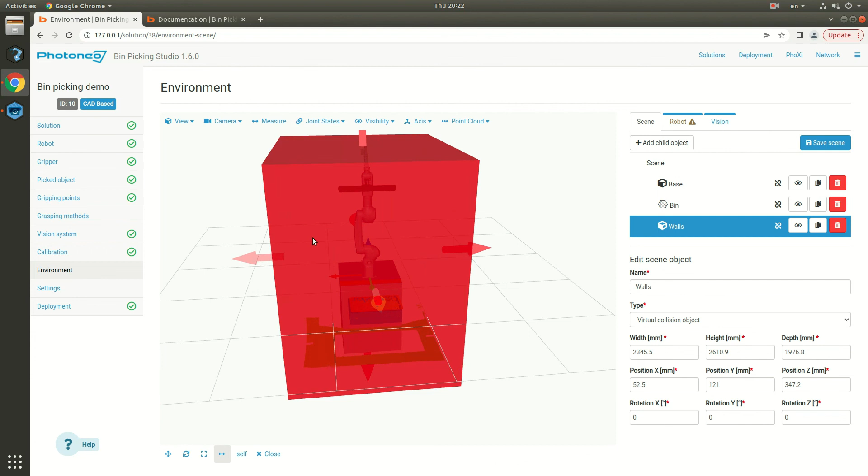On the Robot tab, I can try jogging with the robot. To visualize the current workspace of the robot, I will click the Generate button.

Path planning only needs to be done in the volume of the bin and around it. I should definitely define some joint limits in order for the path planning to have an easier job. It will be faster and more successful. So I'm going to input some values.

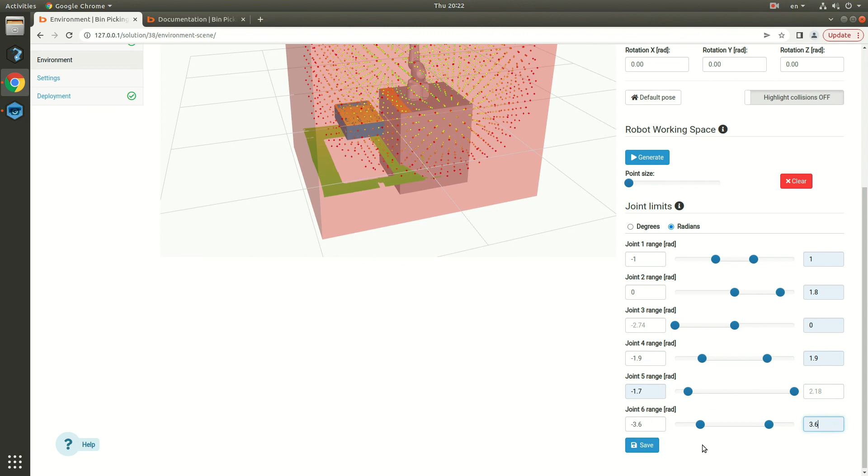I can once again visualize my new workspace. It looks good, it is much smaller, but the bin is still inside it. I can try jogging to confirm the robot can move freely around the bin.

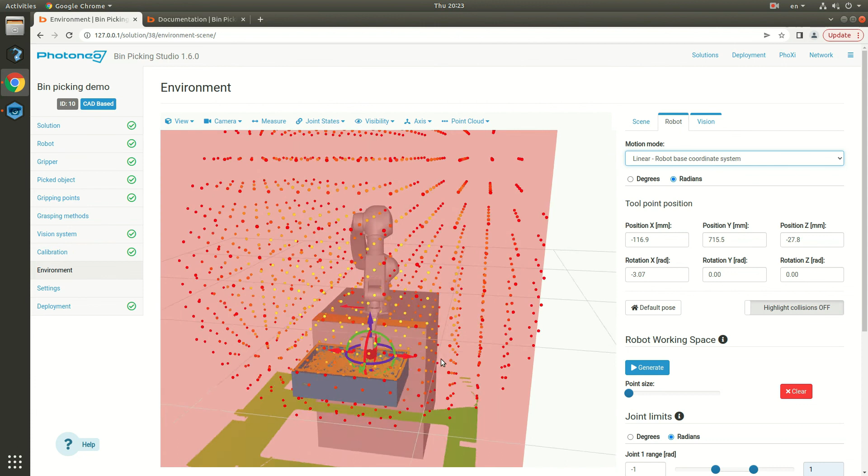I am pretty satisfied with the result, which means I have a completed configuration of my bin picking solution.

I am not going to change any parameters on the settings page. I will use defaults and go directly to deployment.

At first, let's deploy the solution in the simulation mode. This way, I do not need to run the robotic program in order to call bin picking requests, but I can do it manually directly on the deployment page.

When the solution is deployed, I can simply initialize my vision system with the start pose and the end pose.

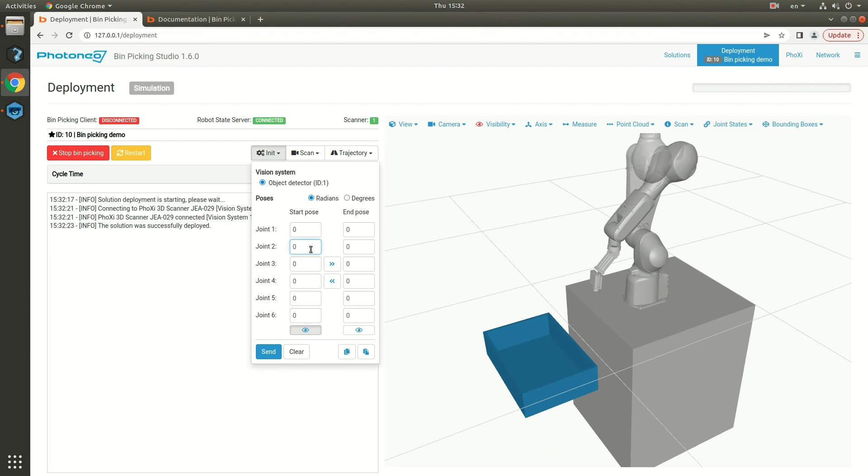I can visualize them so that I'm sure they are correct. I want them just above the bin, and then I can send a scan request.

You can see that immediately new objects are being localized and path planning is being done.

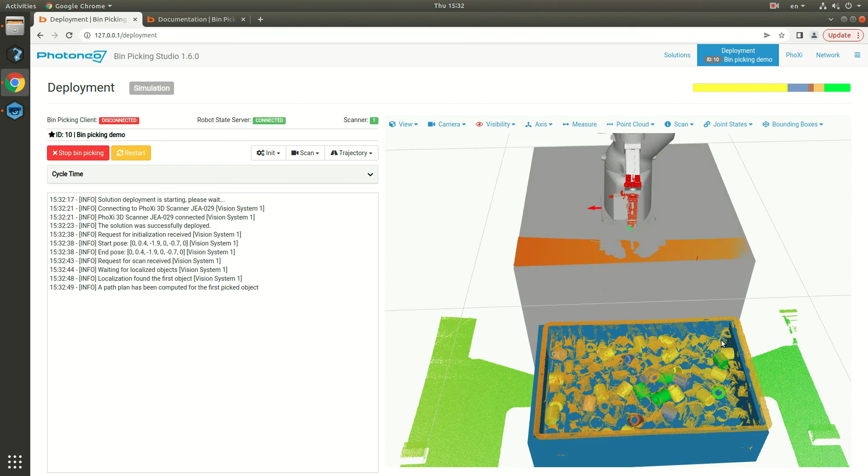We can inspect some objects. For example, the gold ones mean that the volume of the gripper in the grasp waypoint exceeds the threshold for the collision checking, and the bright red means that inverse kinematics failed in this waypoint.

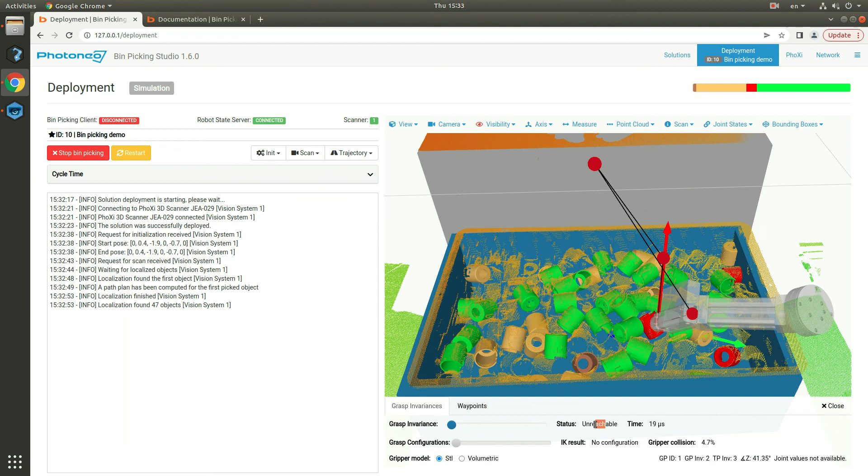All green ones are ready to be picked and we can visualize trajectories for them. You can even replay the trajectory.

Okay, I'm satisfied, so let's stop the deployment in the simulation mode and start it again, but this time in the production mode and with the real robot.

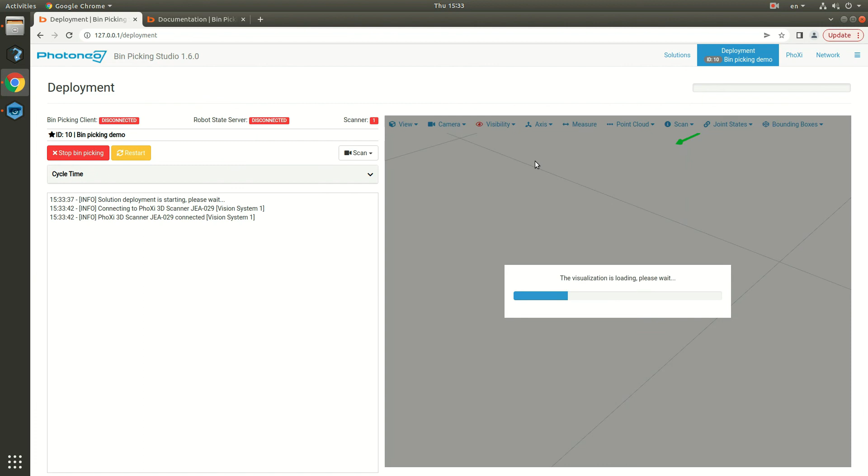The robotic program I'm using is basically the example program included in the robot module. I just added a simple placing routine. So my robot will go above the bin, pick an object, and then go with the attached object back above the bin.

From there, it will go to the placing position where a new scan is requested and the picked object is placed into another bin. Finally, the robot moves above the bin and a new cycle starts. Let's check it.

Okay, you can see that the bin picking is running well, so that's all from my side.